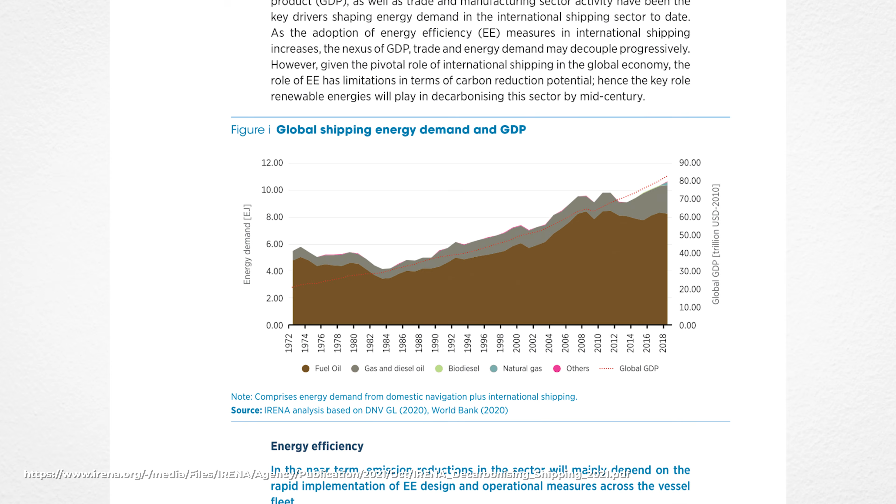In a 2020 study by the IMO, it was reported that global shipping demand was responsible for 3% of the world's greenhouse gas emissions. And as global GDP has grown, so has the energy demand of the shipping industry, a trend which inevitably seems set to continue. Note on this graph that even whilst efficiency improvements have led to some decoupling of the two lines, the overall gradient is still upwards. Put simply, the status quo can no longer be followed. Commercial shipping, and the ships on which it depends, need a rethink.

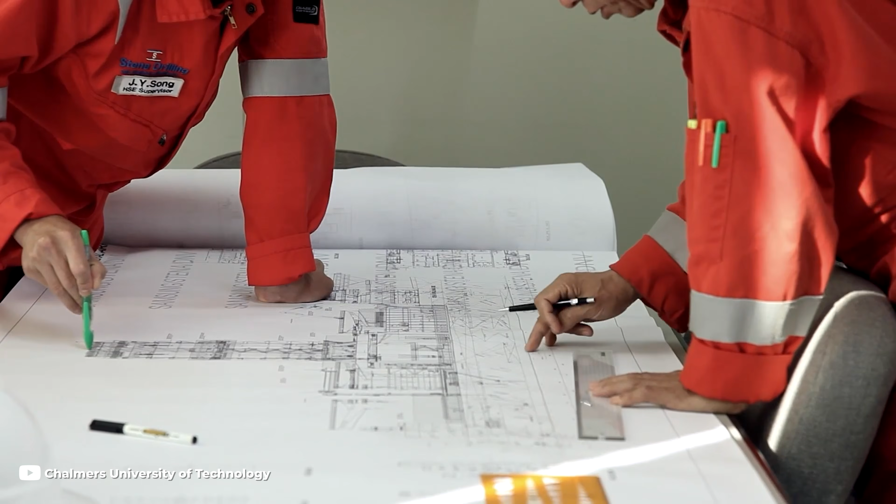Now, I know I sort of said that efficiency improvements aren't getting us far enough, but they still remain effective short-term strategies. And I want to focus on one such strategy in particular, which is the wind. It's probably the oldest method of maritime propulsion, yet in modern day shipping there's a sense it's been extremely overlooked. Recent years, though, have seen an array of philosophies and designs developed that would allow the seagoing giants of today to harness this energy in more effective ways than ever previously possible.

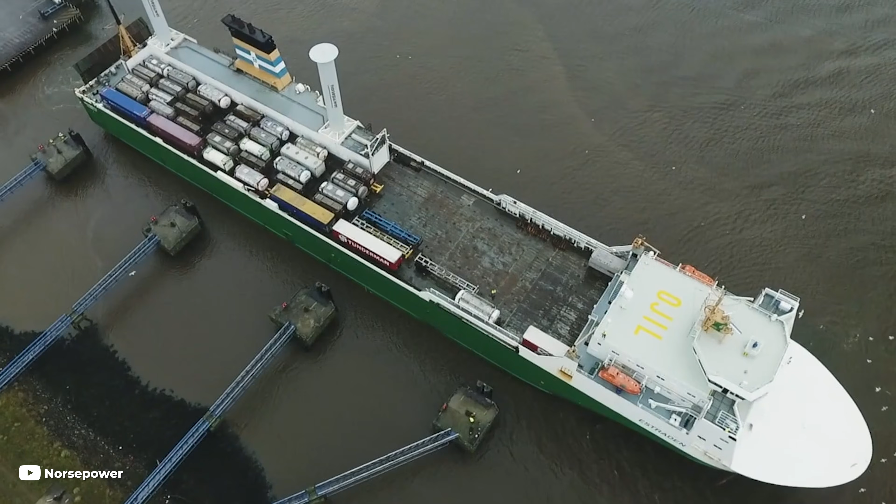According to a Lloyd's Register report, the most popular system as of 2023 has been Flettner rotors, also known as rotor sails, which, by the way, look nothing like sails. They work through a phenomenon known in fluid mechanics as the Magnus effect. In essence, you have a large cylinder rotated at up to 300 RPM. As the wind flows over the cylinder, it interacts with it, causing the flow on one side to move faster than the other. By Bernoulli's principle, the side with the faster moving air has a lower pressure, and so a resultant force is produced perpendicular to the wind direction.

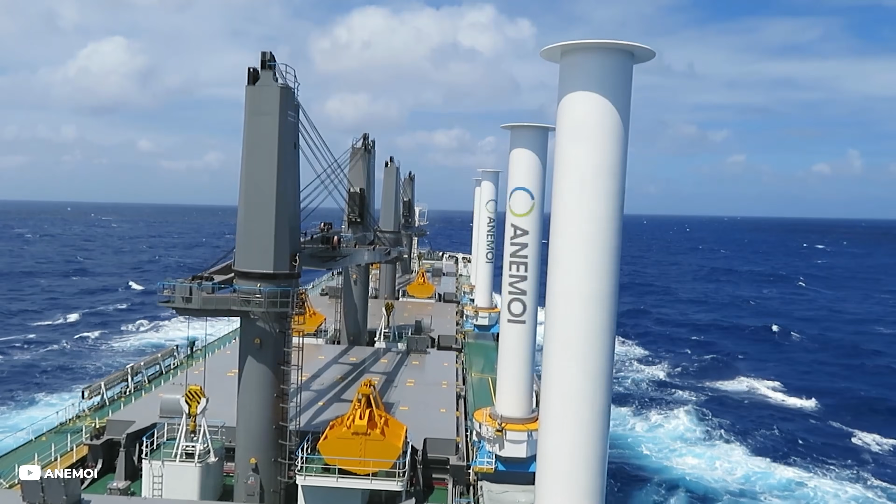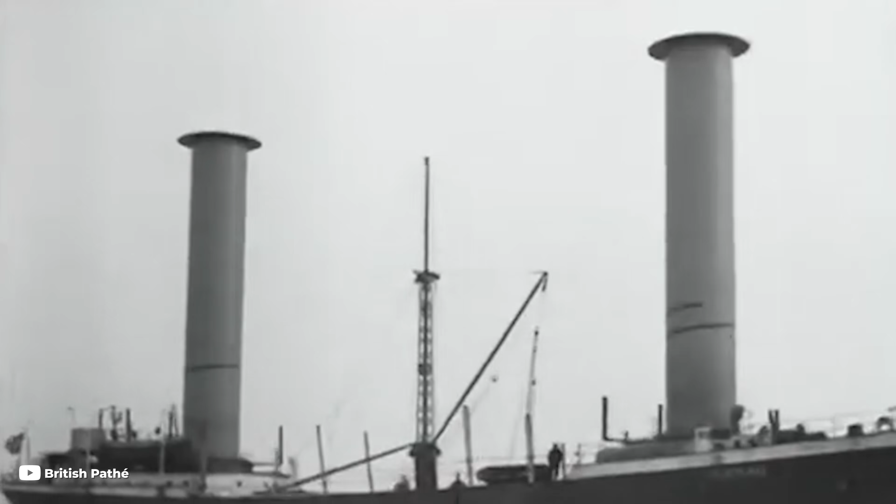As you've probably realised, this therefore is only really effective for crosswinds, but the systems can be relatively simple, and the first ship to use them actually set sail in 1925. The ones being used today are massive structures though, reaching 18 to 25 metres in height and up to 5 metres in diameter.

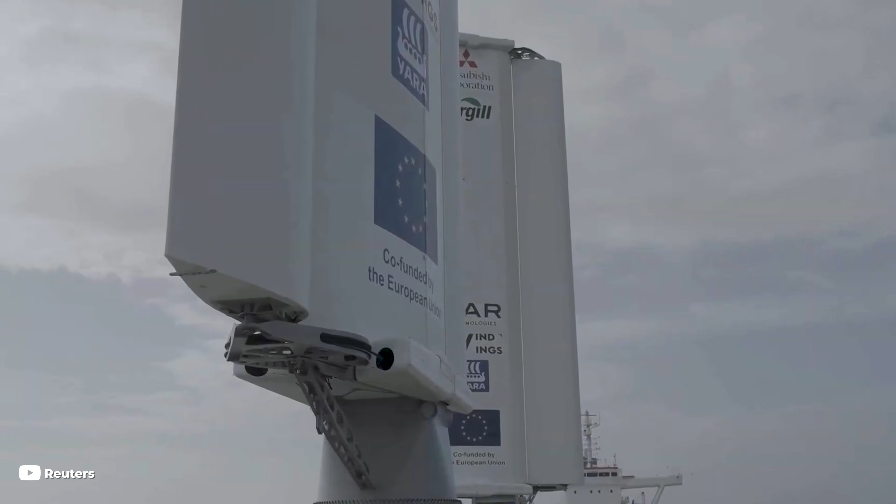Looking forward, an increasingly popular system has been suction wings. Again, these use clever fluid mechanics effects to maximise lift. Suction wings can be thought of as an upgrade from conventional wing sails, which are also in use today. The problem with these conventional hard sails is that they have a limited angle of attack, defined as the angle at which the wing meets the wind. So why is this a problem then?

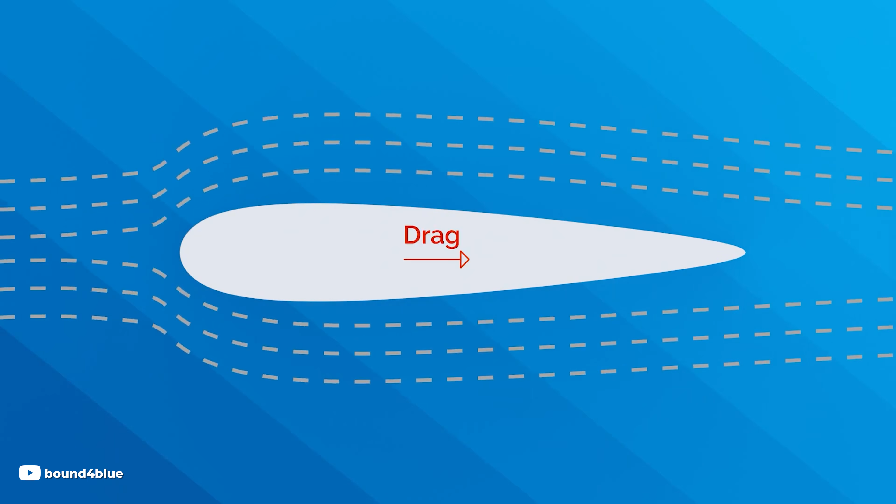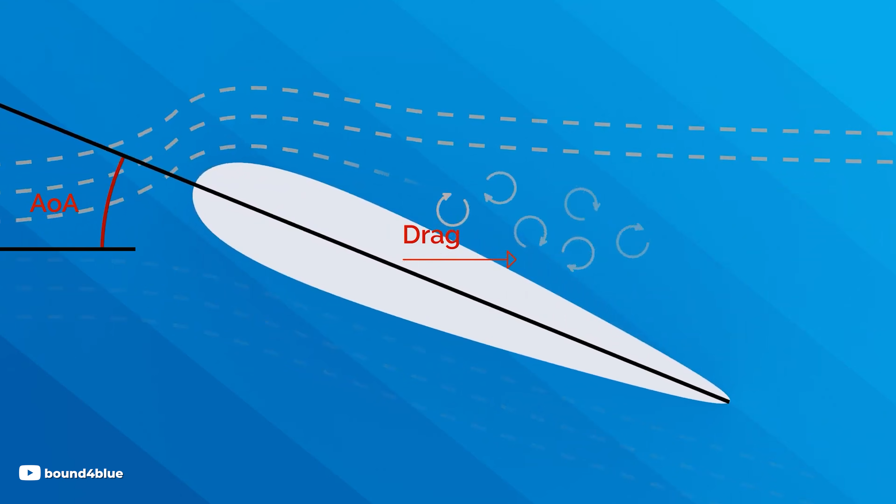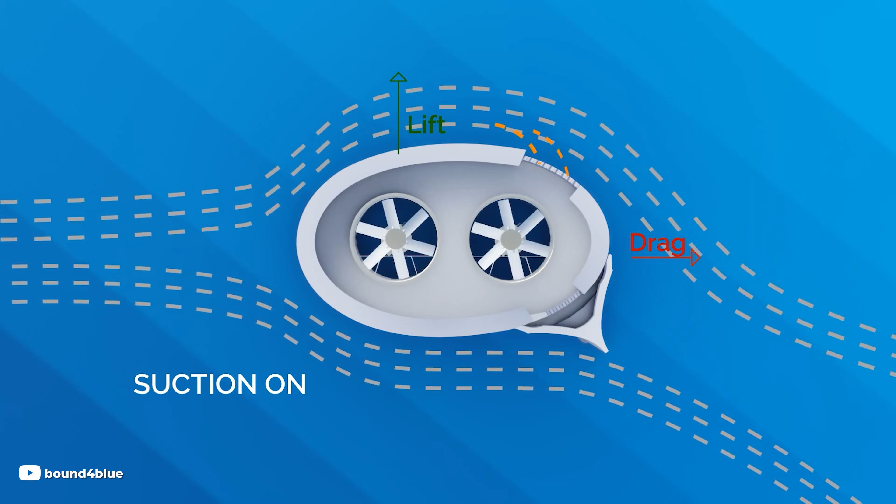Increasing the angle of attack increases the lift, so ideally it's something we want to maximise. The issue with conventional aerofoils is that above some angle of attack we get this phenomenon known as boundary layer separation, where the airflow stops following the curvature of the wing, causing a sudden loss in lift. Suction wings, as the name suggests, solve this problem by using an internal fan to suck the flow onto the wing to keep it attached. This means that these wings can operate at a much higher angle of attack, and so a much greater lift of up to 7 times more than a wing sail.

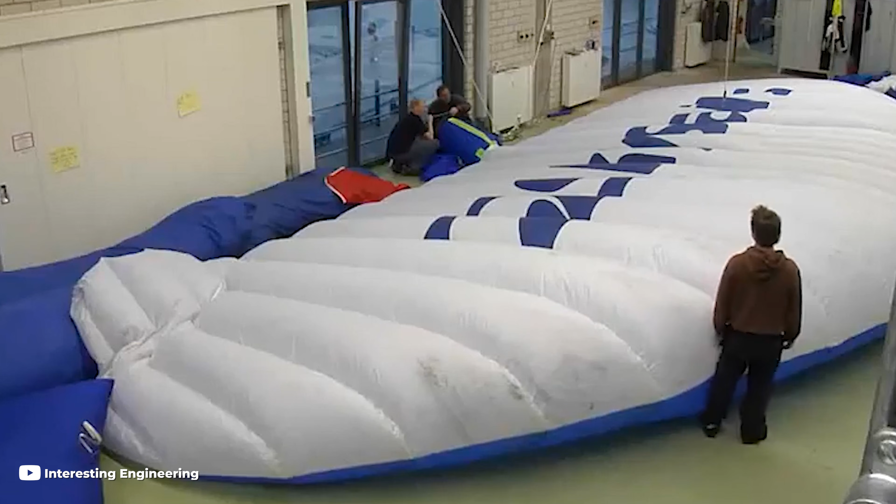Now, a final technology worth mentioning here, more for its novelty than likelihood of widespread adoption, is kite sails. These are indeed exactly as they sound, basically using airborne sails to pull the ship along much like a kite surfer would, taking advantage of typically faster wind speeds at higher altitude. An example of this is French company Airseas, who are developing a kite with a 1,000 metre squared surface, which they say could reduce emissions by 20% on average. There are, however, quoted to be kite sizes of up to 5,000 metres squared in development right now.

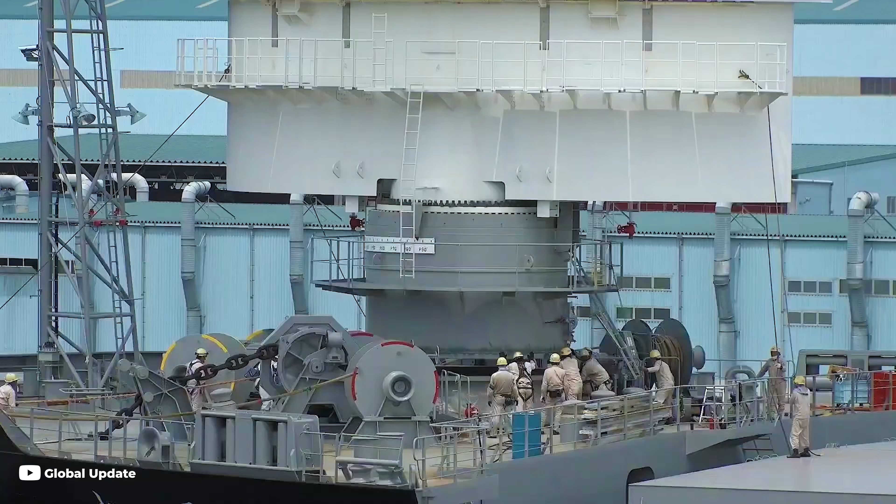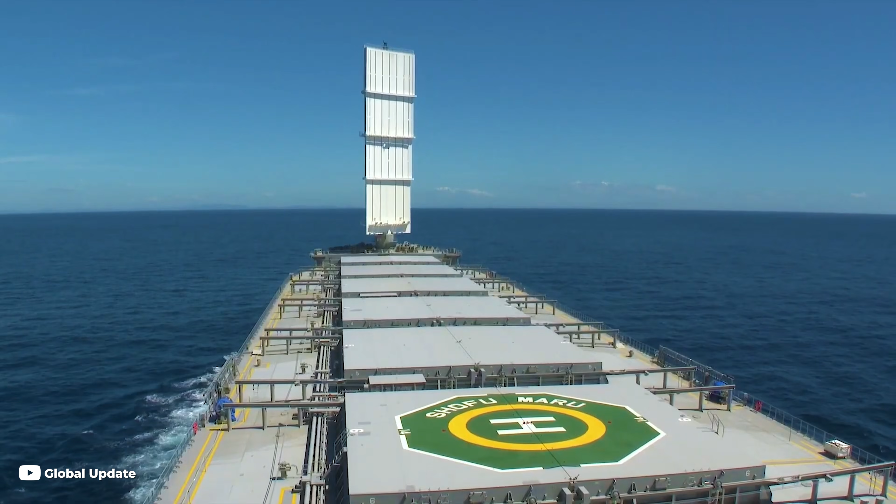The Lloyd's Register report predicts that there will be over 200 projected installations of wind propulsion systems by 2026, which are forecast to be predominantly suction wings followed by Flettner rotors. The factors in their adoption will include their ability to be retracted and systems automated, since having a huge sail up when there is no wind or a headwind could work opposite to the desired effect.

Average fuel savings predictions range from 5 to 15% depending on the technology, but there's also a lot of ambiguity in this figure due to the inherent variability of weather conditions.

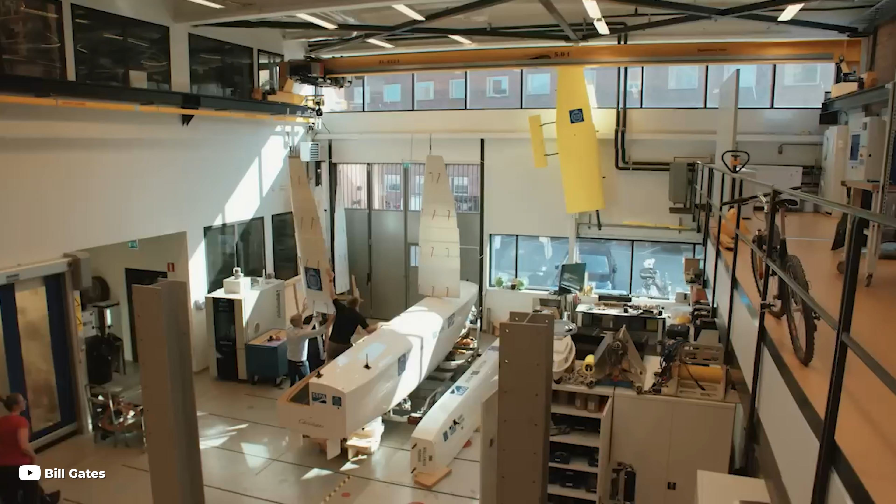Even more exciting perhaps will be the adoption of these technologies in new build ships, since the design of the ship's hull and structure itself can be optimised to maximise on wind-assisted propulsion. I think the key here is that these technologies can be implemented now, with immediate impact and big emissions reduction potential.

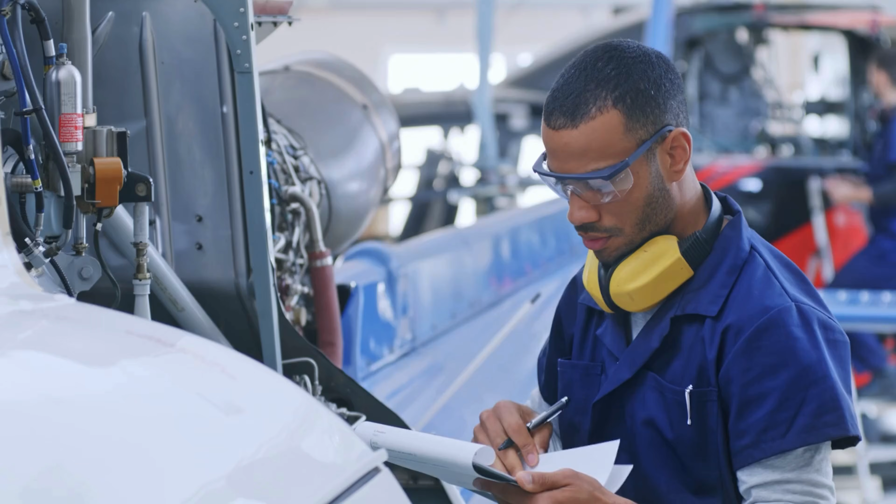But of course, reducing emissions by a tenth isn't going to get us to a carbon neutral shipping sector. So a hot topic at the moment is what is going to power the ships. Unlike in the aviation and automotive industry, where the options seem restricted to only a few viable alternatives, the shipping industry seems to have a much larger pool to decide from, most of which being alternative fuels.

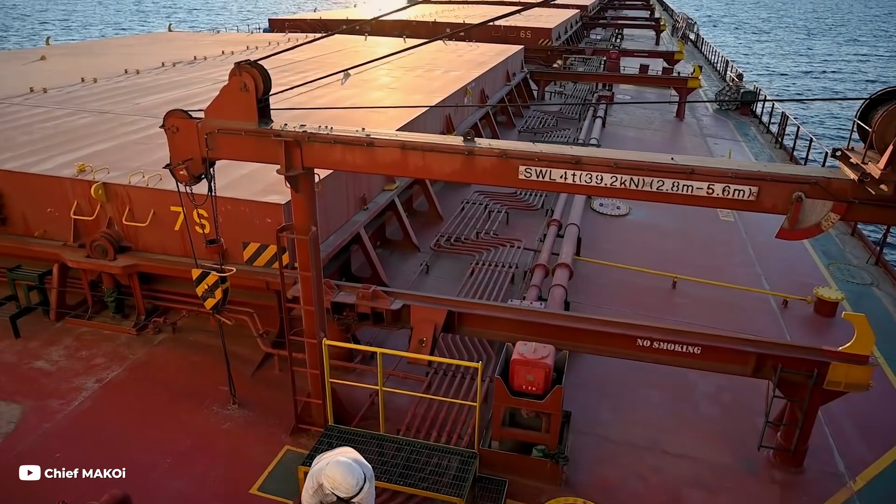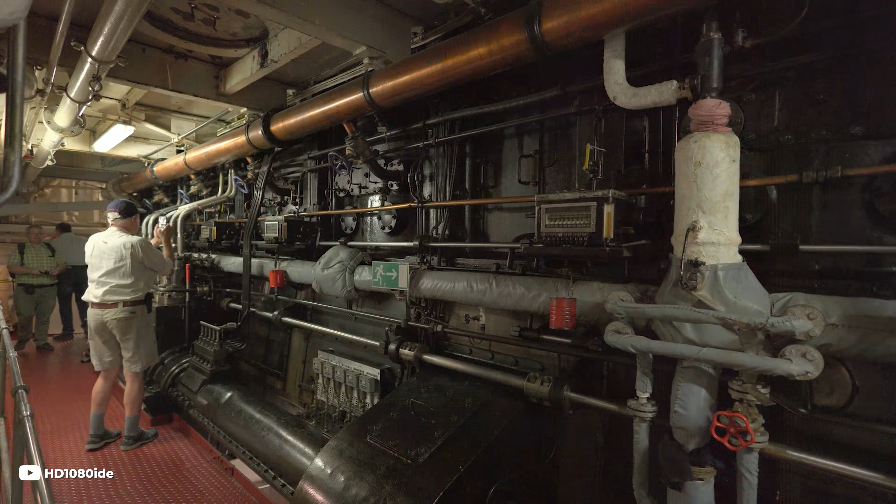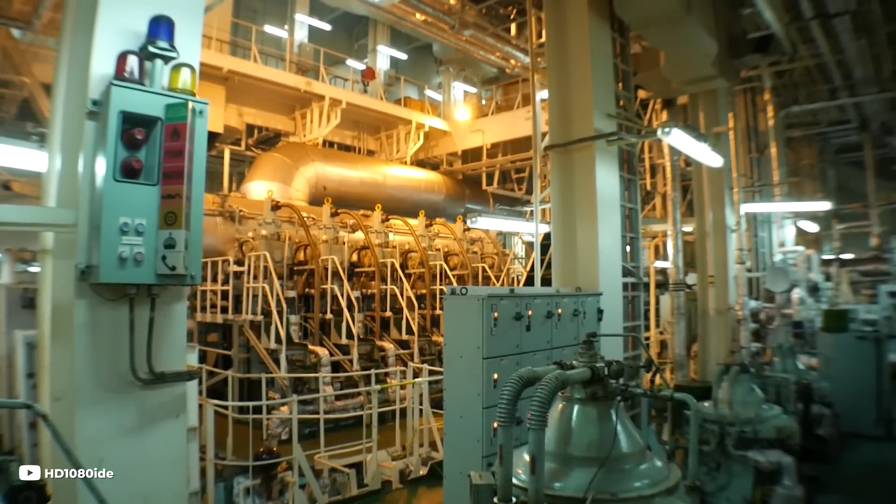In terms of which of these fuels will be used, I think it's easiest to think in terms of short, medium and long-term strategies. What it really boils down to is change. The more you have to change existing engines, storage systems, and fuel production systems, the longer that transition will take, both because of the time for new regulations and standards to be approved, and for those novel technologies to become cost competitive.

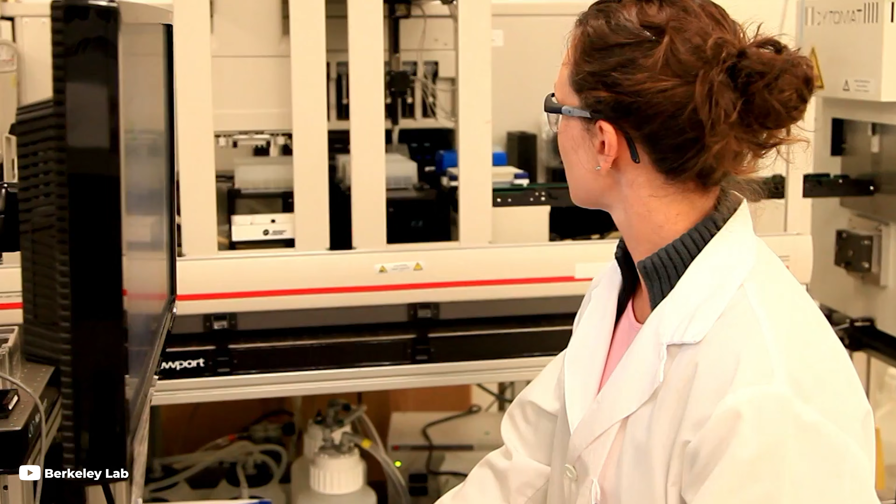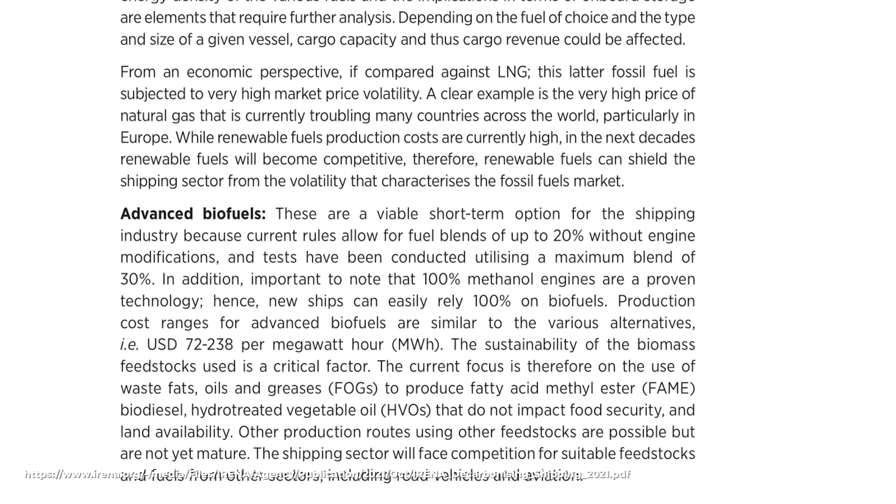Hence, in the near term at least, the industry has focused on what we call advanced biofuels. This is because they can be integrated directly into current engines as drop-in fuels or in blends with existing fuels, requiring very little engine modifications. According to a recent International Renewable Energy Agency, or IRENA, report, current regulations allow for biofuel blends of up to 20% without the need to modify the engine at all.

They were estimated to cost between $72 to $238 per megawatt hour, compared to just $41 per megawatt hour quoted for traditional heavy fuel oil in 2019.

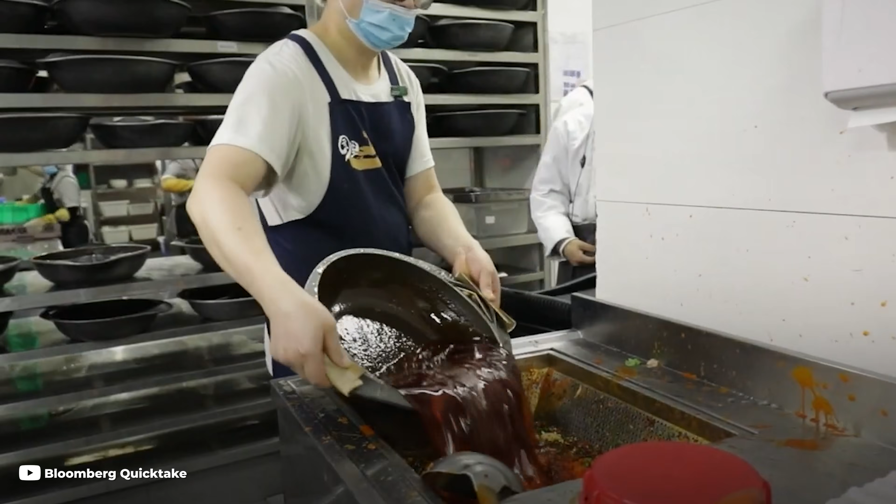So, what is the difference between advanced biofuels and regular biofuels? Advanced biofuels are defined by the European Parliament as biofuels that do not compete directly with food and feed crops, and are often synthesized from waste fats, oils, and greases like cooking oil. A critical issue facing widespread biofuel adoption currently is the lack of feedstock to produce them.

But this was only really a short-term solution, right? So what's next? This is where it gets a little bit more vague, as the shipping industry doesn't seem to have reached a consensus themselves yet.

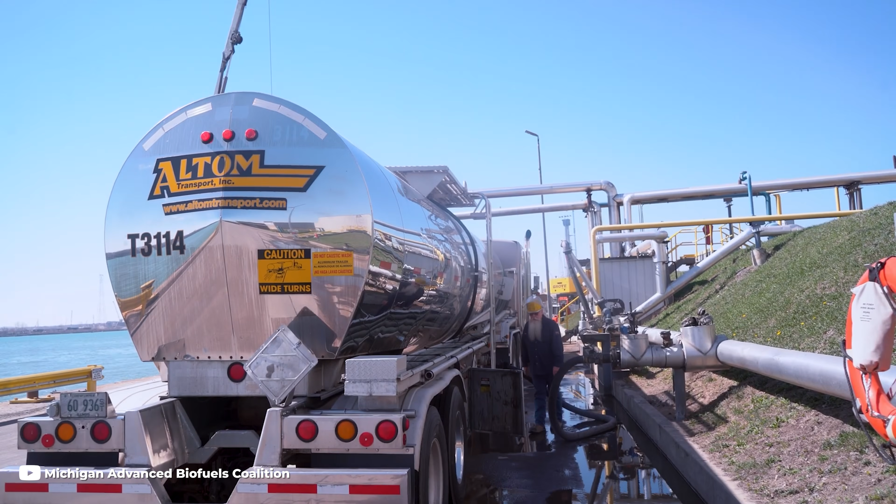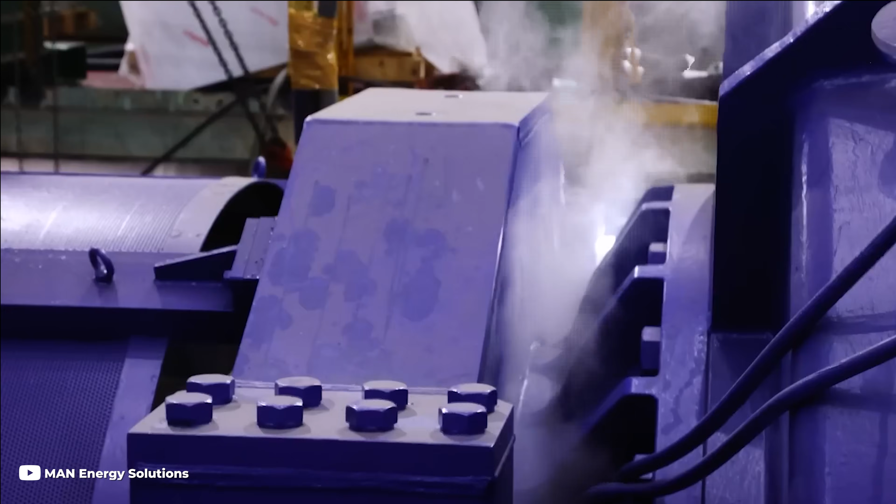Currently, it appears that renewable methanol is winning this race, since it again requires little engine modification. Current ships can be retrofit and run on dual fuel systems of both methanol and heavy fuel oil, maintaining flexibility in this transition period. Other advantages include that it is easy to store since it's a liquid at normal temperatures and pressures, and it's also biodegradable in water.

According to Hydrogen Insight, as of March this year, there were 225 dual-fuel methanol ships on order, scheduled to start service in the next 5 years. This surge is largely motivated by changes to the EU Emissions Trading System, or ETS, which will mandate that ships operating in EU waters fully cover their emissions costs by 2026.

Shipping giant Maersk recently named the 5th of its dual-fuel methanol fleet, which can switch between fuels at the touch of a button. It also has a dozen or so more scheduled to come in the next couple of years.

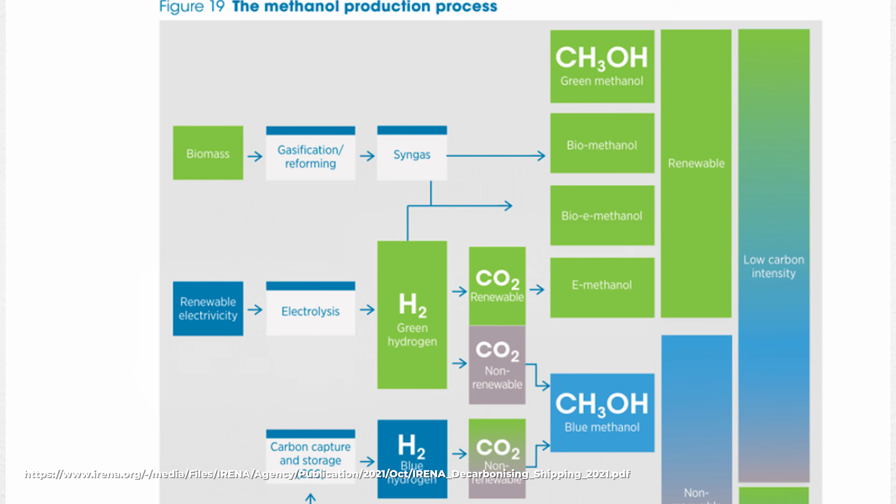Most renewable methanol is produced via one of two routes. Either green hydrogen is reacted with carbon dioxide captured from renewable sources to create a product known as e-methanol. Biomethanol, on the other hand, is generally made through the gasification of biomass.

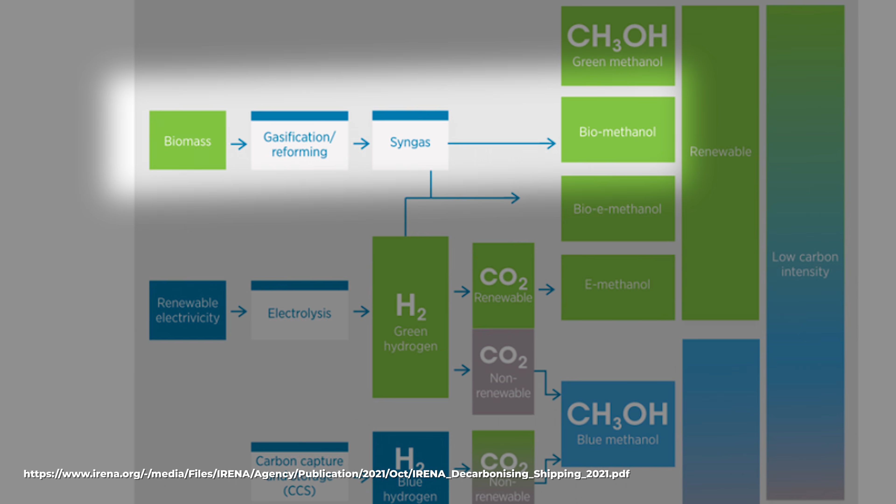The biggest limitations to methanol as an alternative fuel are its lower energy density compared to conventional fuels and its price, forecast at between $107 and $145 per megawatt hour by 2050.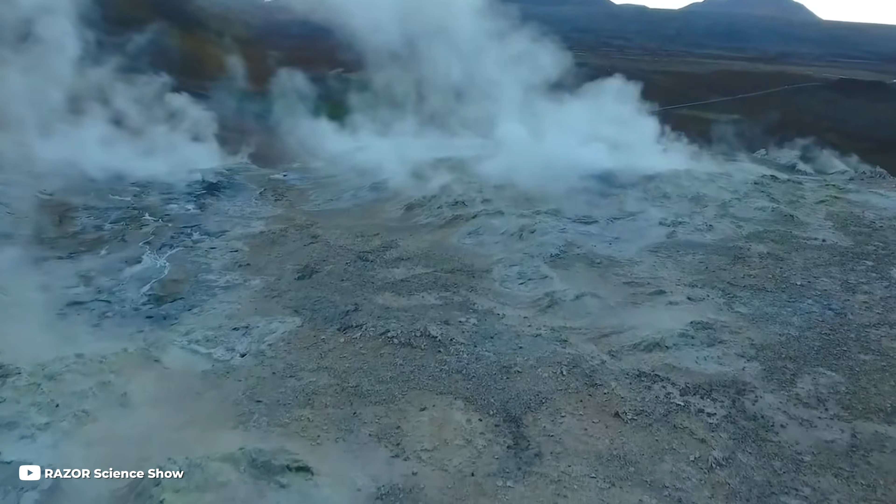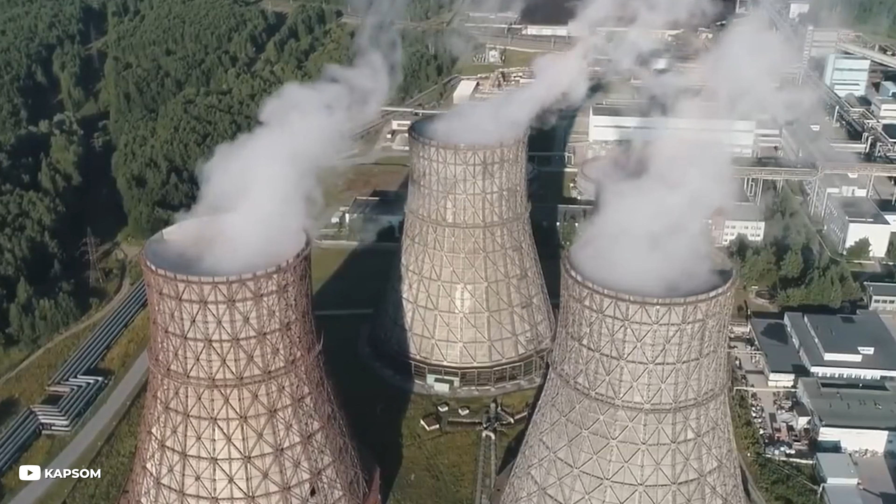Additionally, there are significant concerns regarding the carbon dioxide used in e-methanol production. Capturing this carbon dioxide can be expensive, and it may still lead to net carbon dioxide emissions if it was not originally removed from the atmosphere, for example through biomass growth.

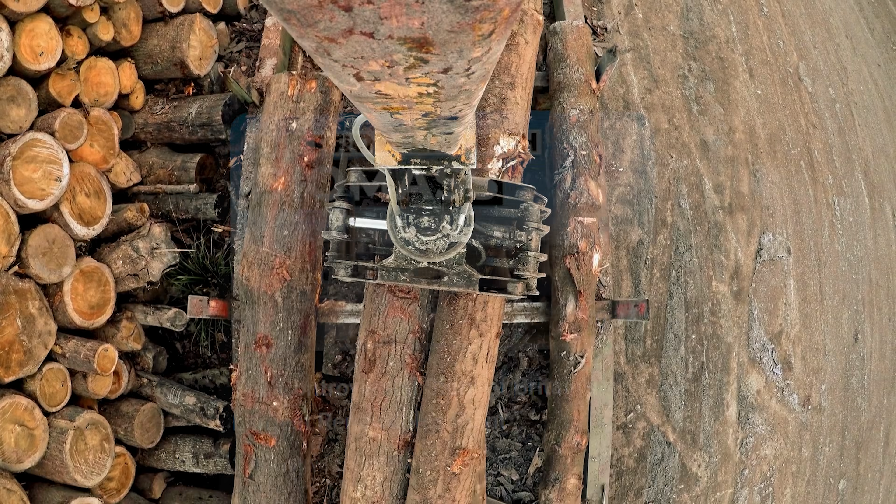However, carbon capture from biomass combustion or gasification, which is required for biomethanol, faces challenges in itself due to inaccurate carbon accounting. For more details on this, feel free to check out one of my previous videos on the Drax power plant in the UK.

In the midterm, methanol may be more favoured for its ease of transition, but in the long term, ammonia is considered more likely to take the lead.

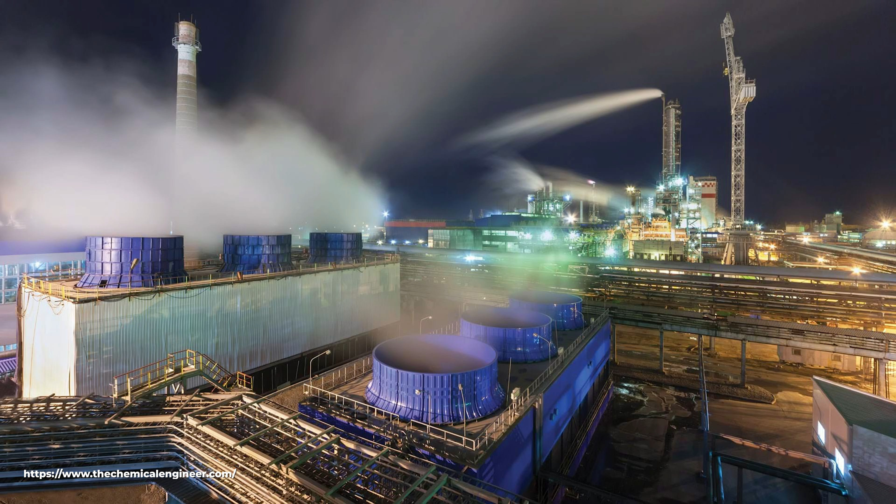On the surface, ammonia appears to be an incredibly promising solution. Currently, most green ammonia is produced through the Haber-Bosch process. This involves electrolyzing water to generate green hydrogen, extracting nitrogen from the air, and then combining the two to produce ammonia. The result is a fuel composed of only nitrogen and hydrogen, and crucially, no carbon.

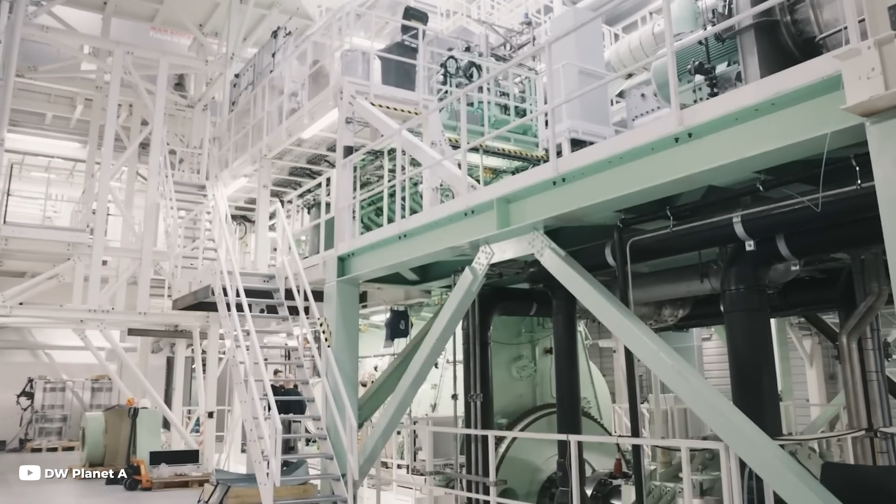Ammonia engines work through internal combustion, driving pistons much like a conventional fossil fuel powered engine would.

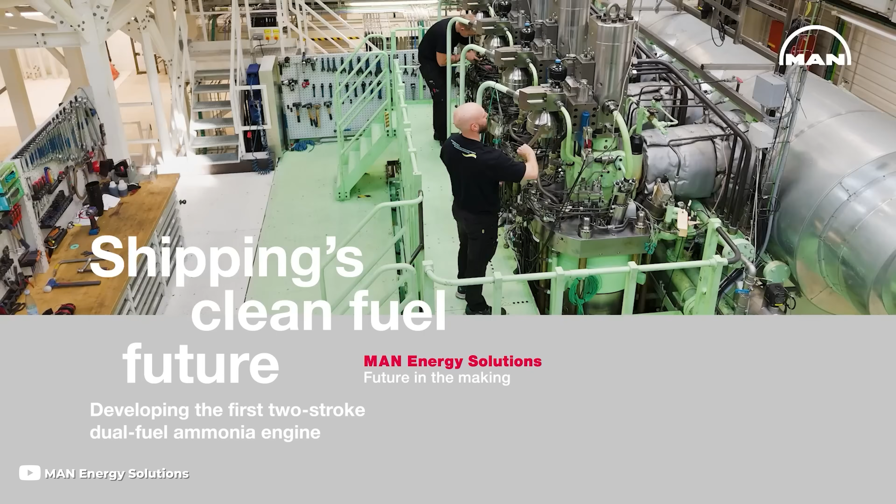The difference though is that the combustion reaction only releases nitrogen and water as products. MAN Energy Solutions, a ship engine supplier, has just started testing the world's first full-scale two-stroke ammonia engine, and hopes to deliver 30 of these engines in the next 3 years.

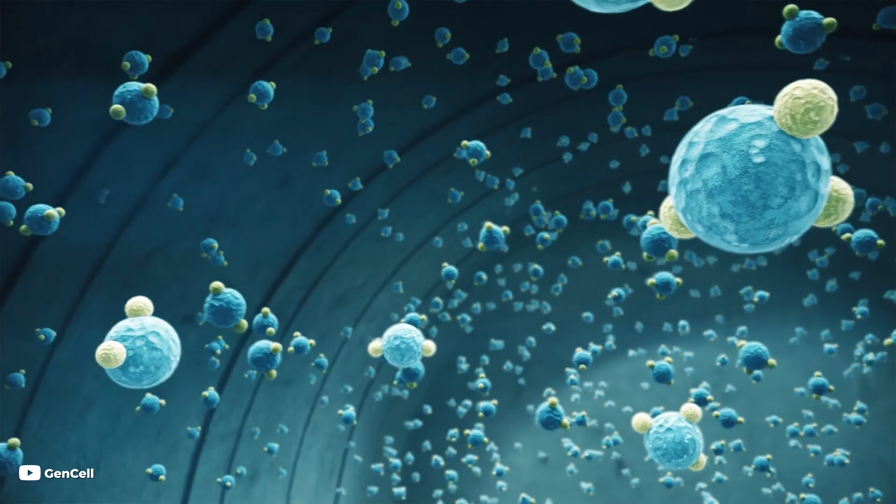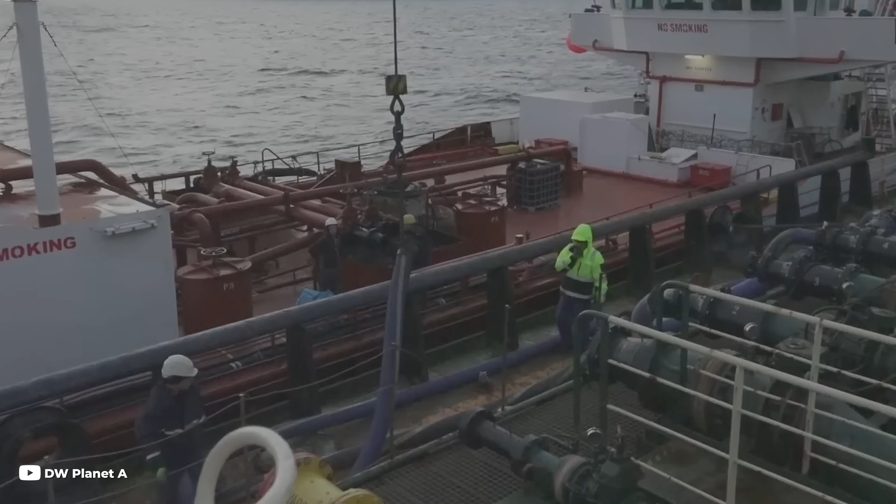So why is ammonia only just joining the party? In short, it's because ammonia is quite different to the fuels we use today, meaning not only a redesign of ships, but also of port infrastructure, safety systems, regulations, and fuel transportation methods. Ammonia is gaseous at room temperature, but can be stored as a liquid at significantly higher temperatures than other gaseous fuels like hydrogen. It's also estimated that ammonia ships will require between 1.6 to 2.3 times the volume of fuel compared to those using heavy fuel oil, but achieving up to 92% greenhouse gas emissions reductions.

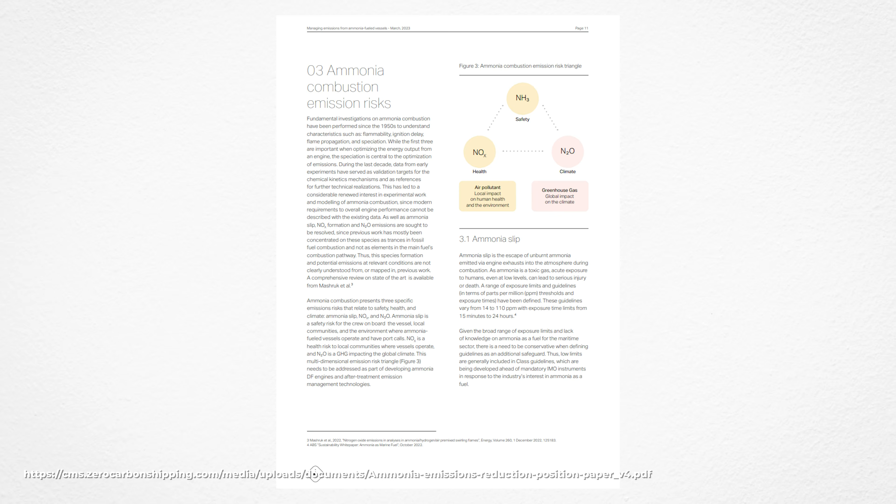One of the greatest fears around ammonia is that it's extremely corrosive and toxic. Therefore, a lot of care must be taken when handling it, and spillages would be severe. Whilst ammonia may be new in shipping though, it's a compound we have long been used to handling in the agriculture industry. Hence, at least according to the IRENA report, these safety concerns should not be a major barrier to adoption. What is more concerning, however, is the potential byproducts produced during its combustion.

As we said, ammonia only produces nitrogen and water when it burns, but that was assuming complete combustion of the fuel. Incomplete combustion may lead to the formation of NOx, or nitrogen oxide, an air pollutant which presents a health risk to humans. Moreover, if uncombusted ammonia ends up in the exhaust, exposure could cause serious harm above certain concentrations. Finally, nitrous oxide may be produced as a byproduct of ammonia combustion, which is a greenhouse gas 265 times more potent than CO2. And so ammonia engine design must account for all these risks and ensure they are adequately managed.

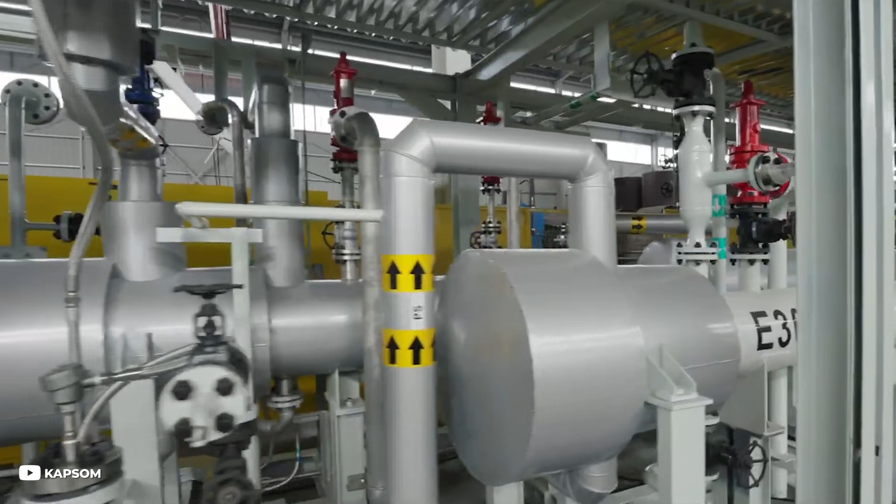It's predicted by IRENA that the fuel will cost between $67 and $114 per megawatt hour by 2050, so a bit cheaper than methanol.

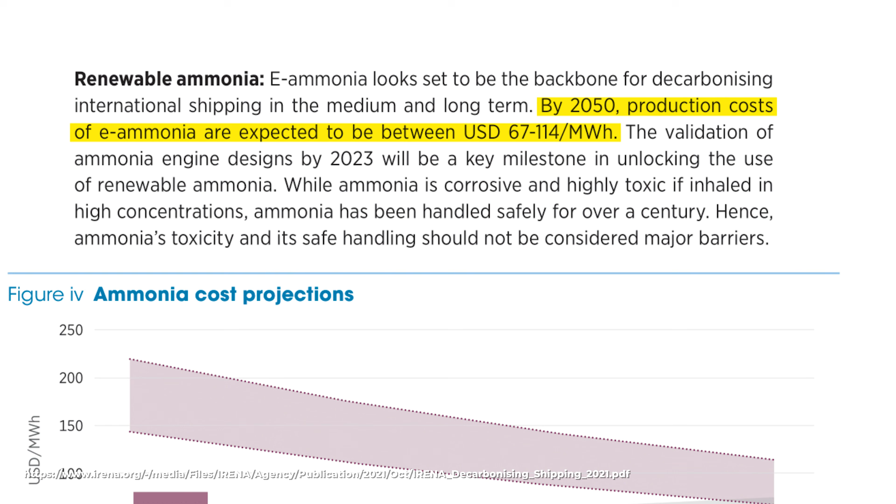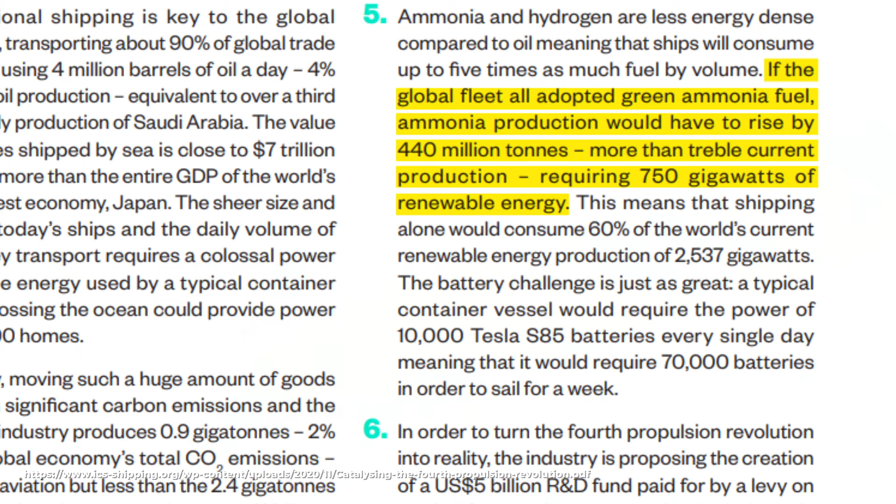Widespread adoption though won't be easy. The International Chamber of Shipping stated in a report that if the global fleet all adopted green ammonia as a fuel, green ammonia production would have to rise by 440 million tonnes, more than treble current production, requiring 750 gigawatts of renewable energy. This would mean shipping alone would consume 60% of the world's current renewable energy production of 2,537 gigawatts.

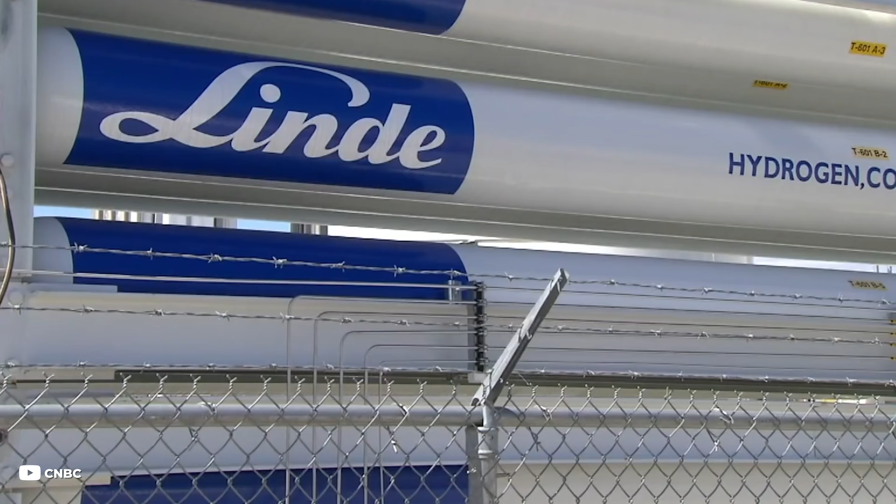You might also be wondering at this point, since green methanol and ammonia both use green hydrogen, why don't we just use that green hydrogen directly in, say, a fuel cell or combustion engine? The problem here is that hydrogen is a completely different fuel to anything being used today. Using hydrogen as a fuel would require a complete refit of ship fuel and engine systems.

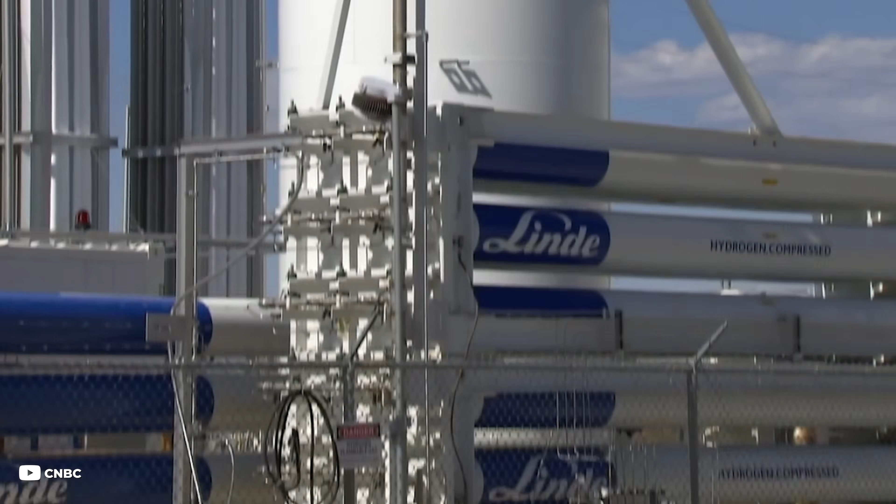But really, the problem here comes down to fuel storage. According to an article in Forbes, even if you liquefied the hydrogen, which happens at 20 degrees above absolute zero, you'd still need 4 times the volume of fuel tanks as currently used. As a side note, battery technology is also being explored in this space, but only really for shorter routes.

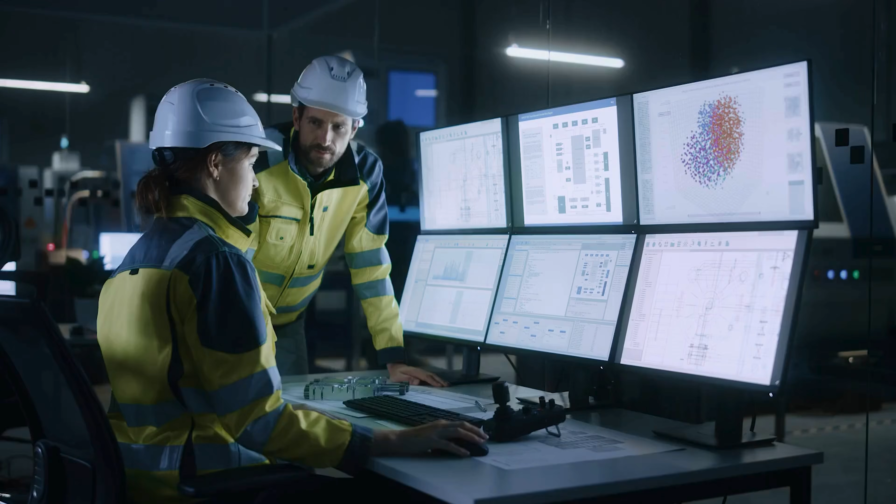Now finally, it wouldn't truly be a 2024 discussion without touching on AI, right? So how is AI shaping the future of shipping? Traditional route planning based on fixed schedules and predetermined paths is increasingly being replaced by real-time dynamic optimization. Machine learning models are now capable of analysing a wide range of factors, such as engine speeds, routes, and journey times, while still meeting constraints like departure schedules, arrival windows, and designated route envelopes.

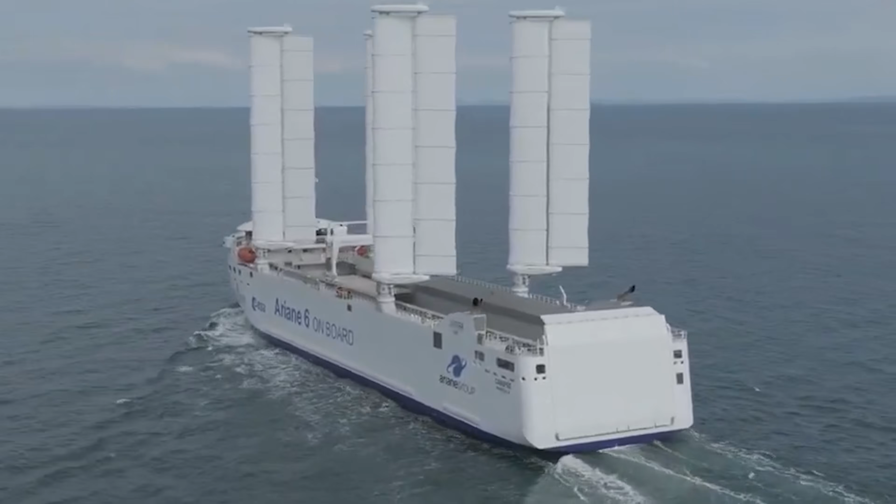What's more, these models adapt on the go to variables such as weather, sea currents, and port congestion, enhancing both safety and efficiency. Looking back at the earlier discussion on wind propulsion, AI could also be used to predict wind patterns to chart routes that optimize fuel consumption, taking advantage of this natural wind assistance.

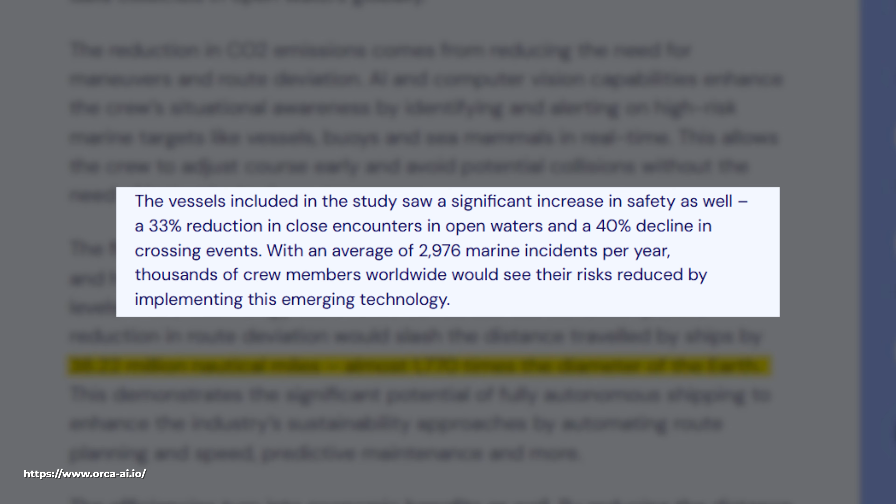According to Orca AI, a startup in this space, integrating AI-assisted navigation on commercial vessels could reduce global carbon dioxide emissions by 47.6 million tonnes per year if adopted fleet-wide. It also says it could cut shipping distances by 38.22 million nautical miles, equivalent to circling the Earth 1,770 times. On top of that, the study highlights significant safety improvements, including a 33% reduction in close quarters incidents and a 40% drop in crossing conflicts in open waters. In short, AI is transforming the shipping industry, making it smarter, safer, and more sustainable.

I think it's clear that the shipping industry is on the brink of a transformative era. We're witnessing a shift that's not just about adapting to stricter regulations, but about rethinking how global trade can operate sustainably. This was by no means comprehensive coverage, but let me know if you think I've missed out something big in the comments.